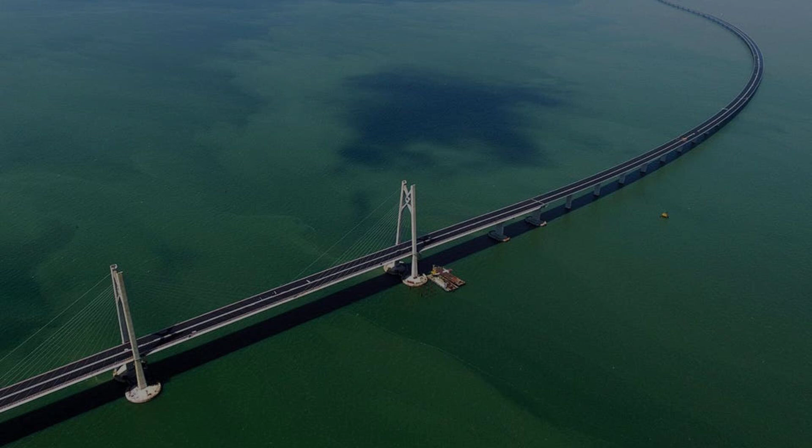It's the longest bridge ever built, stretching an impossible 164.8 kilometers across China's floodplains and lakes, a structure so vast that, by all common sense, it shouldn't even stand. Every engineer knows, for each extra span, the risks multiply. Soil that swallows support columns, fault lines ready to crack concrete, typhoons strong enough to tear steel and lift loads from thousands of speeding trains.

By traditional logic, this record-breaking bridge should already have failed. So why does it defy the odds? And what hidden choices let it survive day after day? The answer isn't a single miracle, but 1,000 invisible defenses you've never seen. And every one is about to be tested.

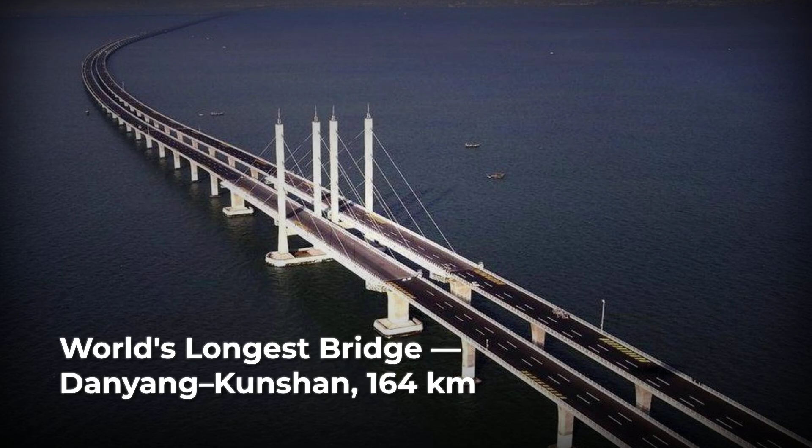The title of longest bridge is less straightforward than it seems. Different authorities use different yardsticks, and the record can shift depending on how you measure. The Danyang Kunshan Grand Bridge in China holds the Guinness World Record for overall length, stretching 164.8 kilometers across the Yangtze River Delta. This measurement includes every elevated viaduct, approach ramp, and segment, whether the bridge crosses water, marsh, or dry land. By this metric, it is the world's longest bridge, nearly 4 times longer than the English Channel itself.

Other bridges claim records by focusing only on certain segments. The Lake Pontchartrain Causeway in the United States, for example, is often called the longest bridge over water, at 38.4 kilometers of continuous span above the lake. The Hong Kong, Zhuhai, Macau Bridge, at 55 kilometers, is promoted as the world's longest sea crossing, combining bridges, artificial islands, and a tunnel under the Pearl River Delta.

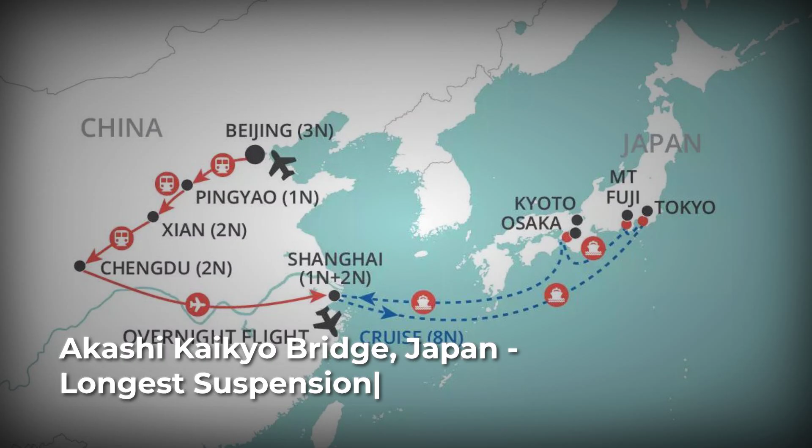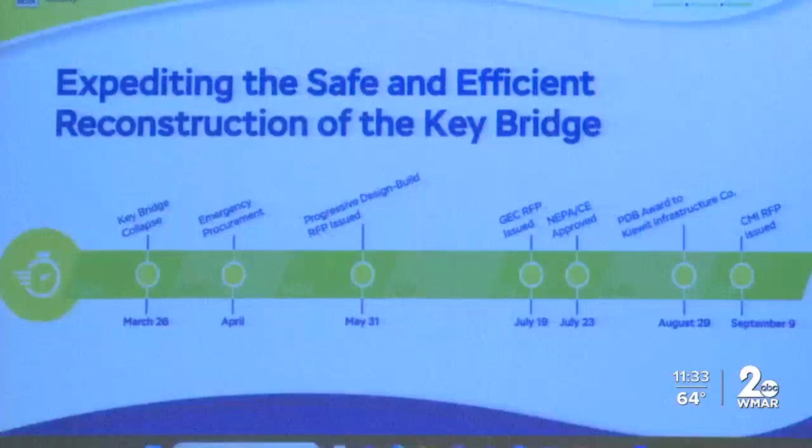Meanwhile, the Akashi Kaikyo Bridge in Japan is recognized for the longest single suspension span, at 1,991 meters between towers, a feat of unsupported engineering. There is no single technical standard. Some lists count every approach and elevated segment. Others count only the main span or uninterrupted water crossing. National governments and engineering bodies often choose the definition that best highlights their own achievements.

For China, the Danyang Kunshan Grand Bridge is a symbol of scale. 164.8 kilometers of viaduct, supported by more than 9,500 piers, carrying high-speed trains at up to 300 kilometers per hour. The bridge connects the cities of Danyang and Kunshan, threading across floodplains, rice paddies, and open water. Choosing this alignment was never about chasing a record.

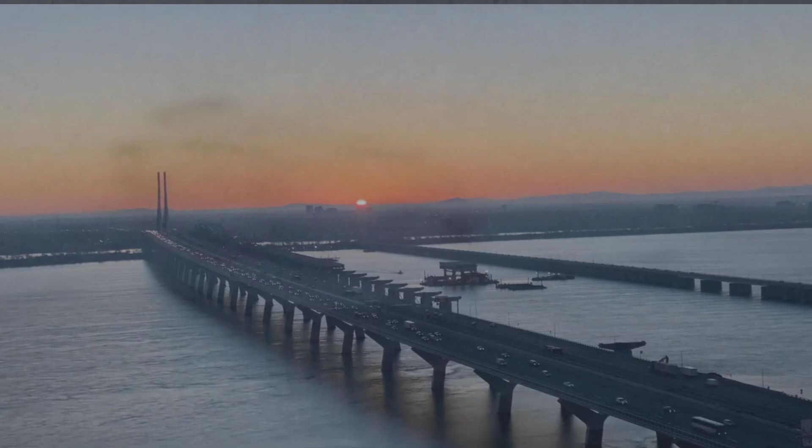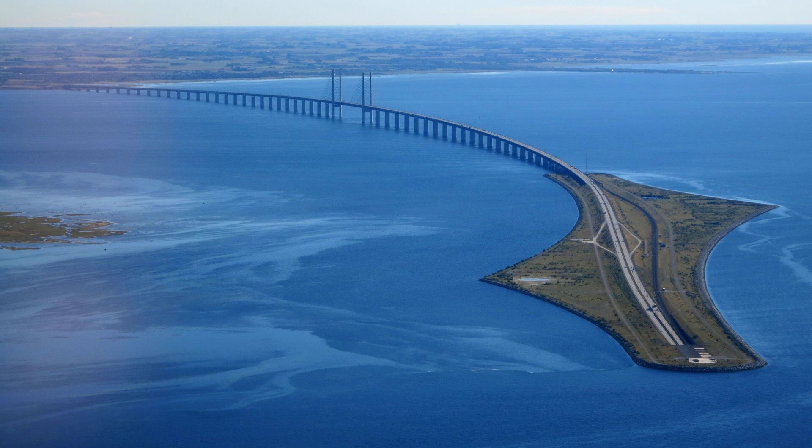Engineers weighed every alternative: tunnels, causeways, ferries, and found each one lacking. Tunnels at this scale risk leaks, ventilation failures, and massive upfront costs. Ferries mean delays, weather shutdowns, and limited capacity. Only a continuous viaduct could deliver the reliability, speed, and year-round operation demanded by China's high-speed rail network. The result is a bridge that redefines the very idea of crossing, a structure so long that, from end to end, the earth itself seems to curve beneath it.

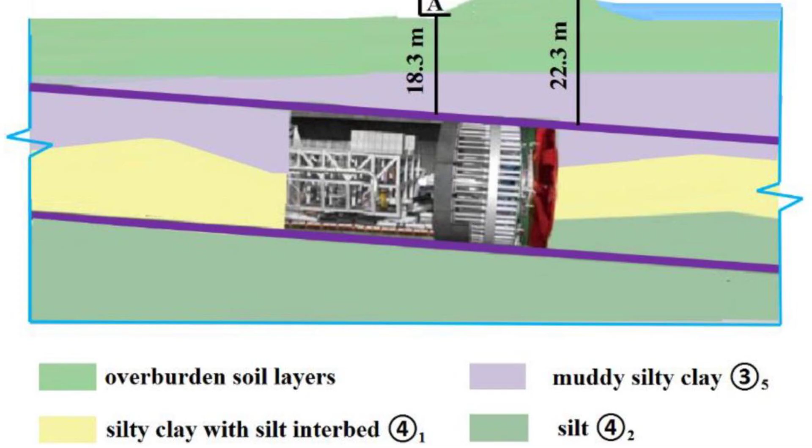A viaduct was not the obvious answer. On paper, a tunnel offered shelter from storms and ship collisions, but the Yangtze Delta's soft soils, high water table, and shallow bedrock made deep excavation hazardous and expensive. Ventilation alone would require vast shafts every few kilometers, and any fire or blackout could trap thousands underground.

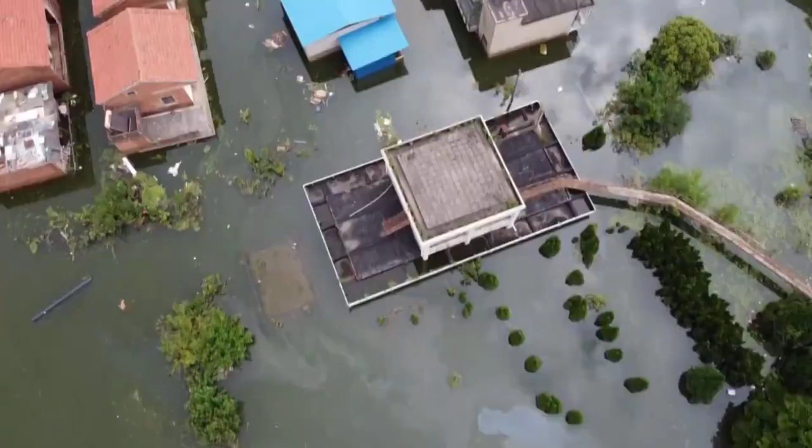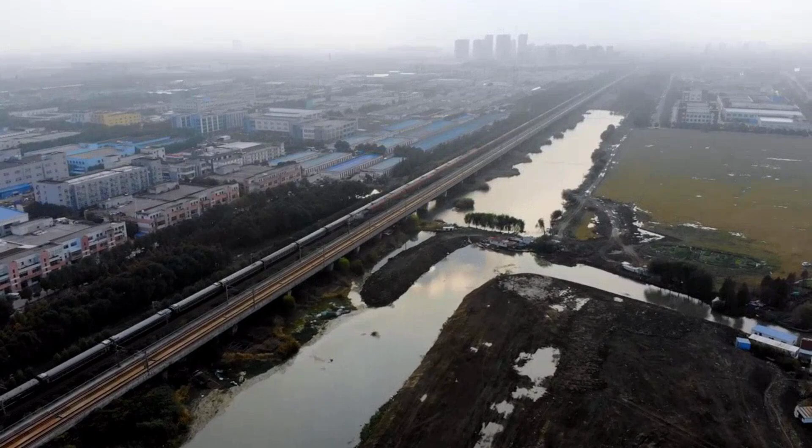Ferries, once the lifeline of the region, are no match for modern demand. Each crossing is at the mercy of fog, typhoons, and river floods, with hours lost to weather shutdowns and maintenance. Even a causeway, solid earth embankments across the marsh, would block water flow, disrupt fragile wetlands, and quickly erode under the relentless current. The viaduct, a continuous ribbon of concrete and steel, offered speed and certainty. But this choice unlocked a new set of dangers, multiplied by the bridge's record length.

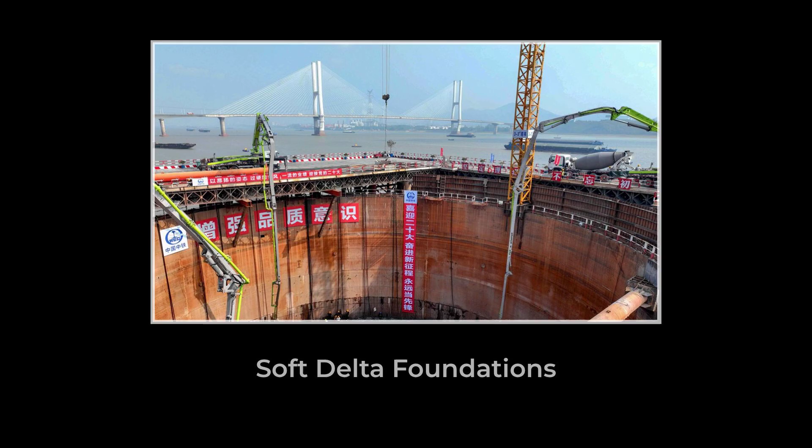The entire route sits atop delta soils prone to settlement and liquefaction, especially during floods or earthquakes. Land beneath the piers may sink or shift, twisting the structure above. Active seismic faults cut across the alignment, threatening sudden ground movement. Typhoons sweep in from the East China Sea, bringing hurricane-force winds and waves that test every span, every joint.

Rivers flood with little warning, scouring away the ground around piers and foundations. The risk of ship collision is ever present as barges and tankers thread narrow channels beneath the bridge. Temperature swings of 40 degrees Celsius stretch and shrink the deck by meters, straining every joint and bearing.

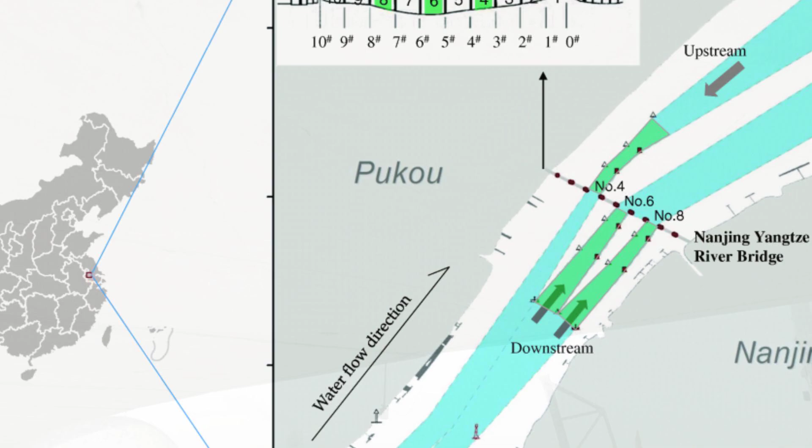And above all, the bridge must carry the live load of hundreds of high-speed trains each day, each one a moving shockwave of force. Every kilometer adds another layer of risk. The longer the bridge, the more ways nature can find a weak point.

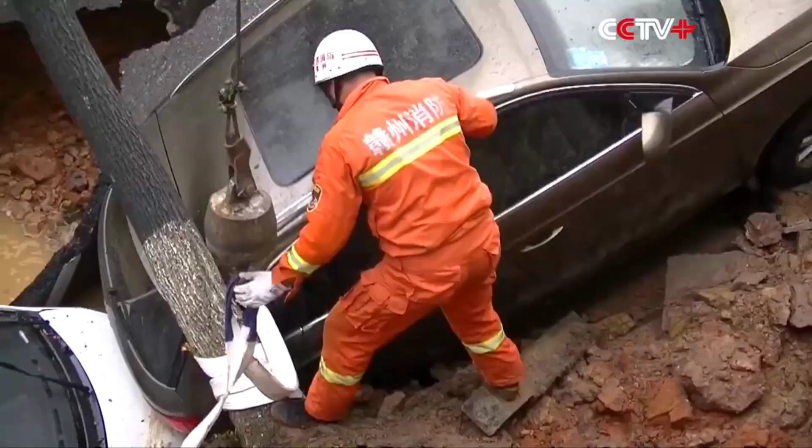Engineers had to face not just one hazard, but a tangled web: soft ground, sinking land, earthquakes, storms, water, ships, heat, and the weight of relentless traffic. The solution would demand new thinking at every step. Only by stacking defenses, foundation by foundation, could the bridge hope to survive where, by all rights, nothing so ambitious should ever stand.

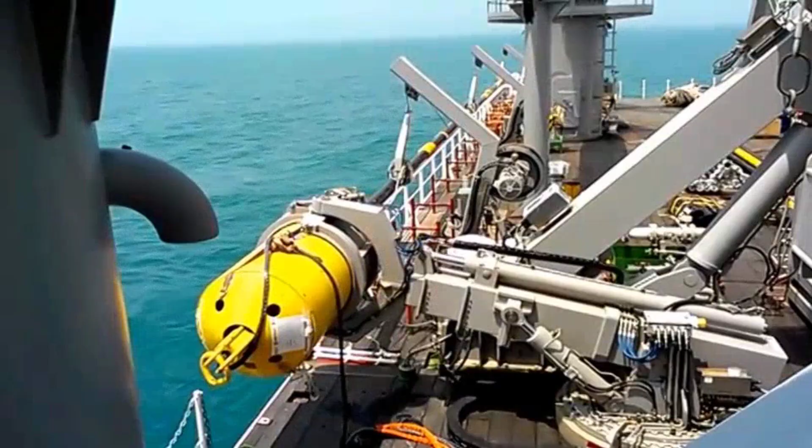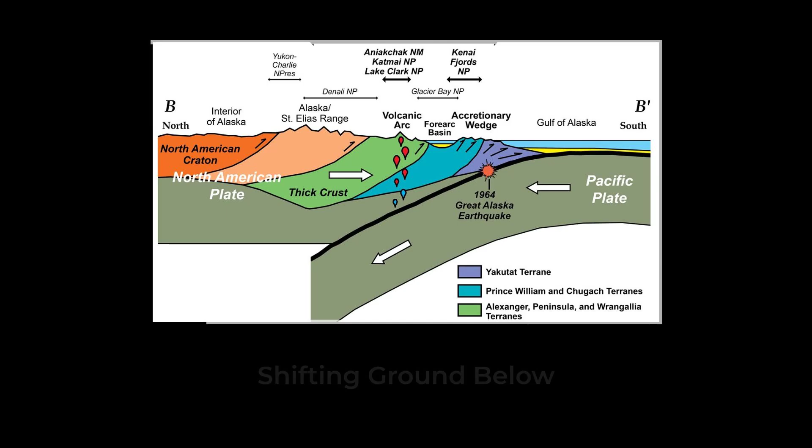Li Changhe stands at the edge of the Yangtze Delta, boots sinking slightly into ground that looks solid but cannot be trusted. Beneath the surface, layers of silt and clay run hundreds of meters deep, deposited by ancient floods and tides. This is the greatest threat to the world's longest bridge, not wind, not water, but the slow, invisible movement of the Earth itself. To anchor a structure stretching 164.8 kilometers, engineers must reach past the softness.

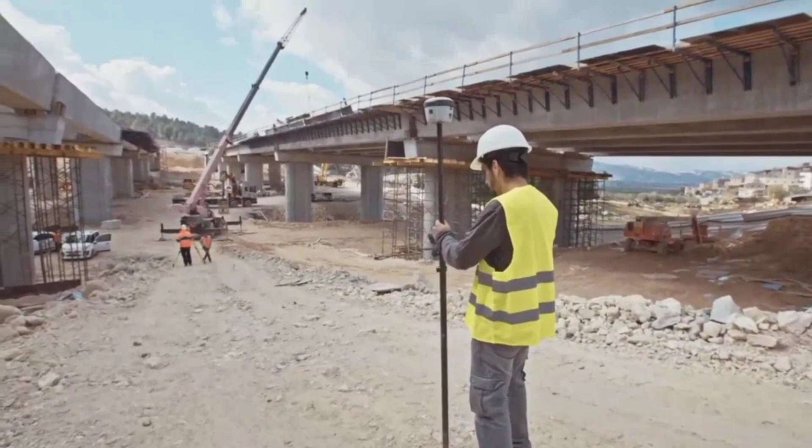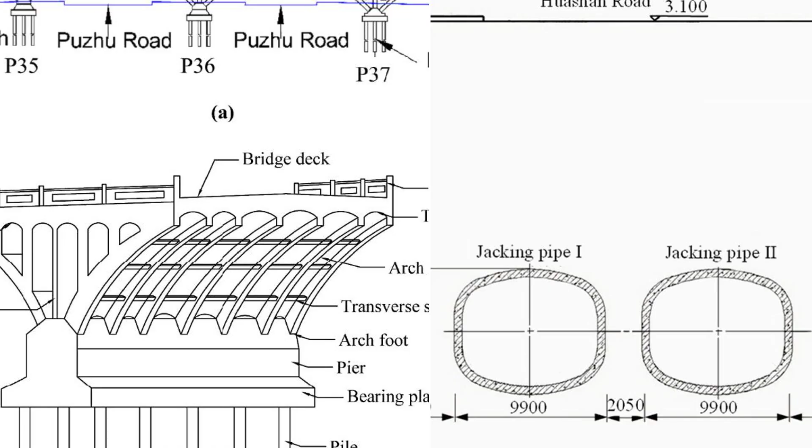Each pier sits atop a forest of concrete piles, driven 50 to 70 meters below the marsh until they bite into stable sand or gravel. Some piles are as long as a 20-story building laid on its side. The load of the bridge is transferred downward, bypassing the unreliable upper layers and settling on ground that has not moved for millennia. But even this is not enough.

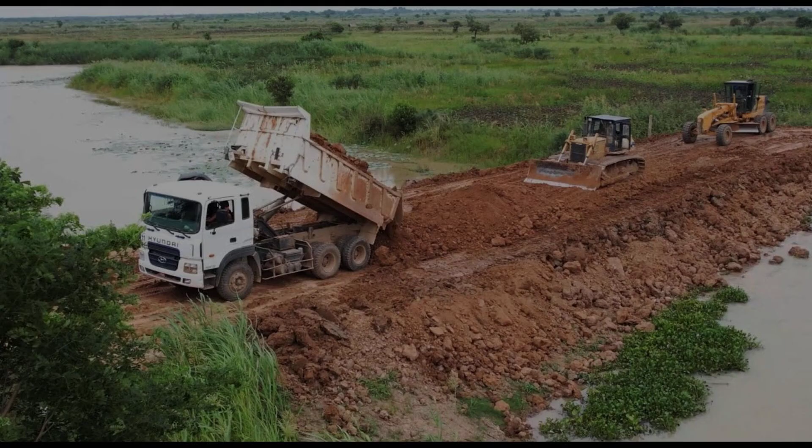Before a single span rises, the Earth must be taught to carry weight. Months before construction, teams haul in tens of thousands of tons of fill, stacking soil into low mountains along the road. This pre-loading, or surcharge, compresses the ground, squeezing out water and forcing the clay to settle ahead of time. Sensors record every millimeter of movement. In some places, the land sinks by more than half a meter over the course of a year.

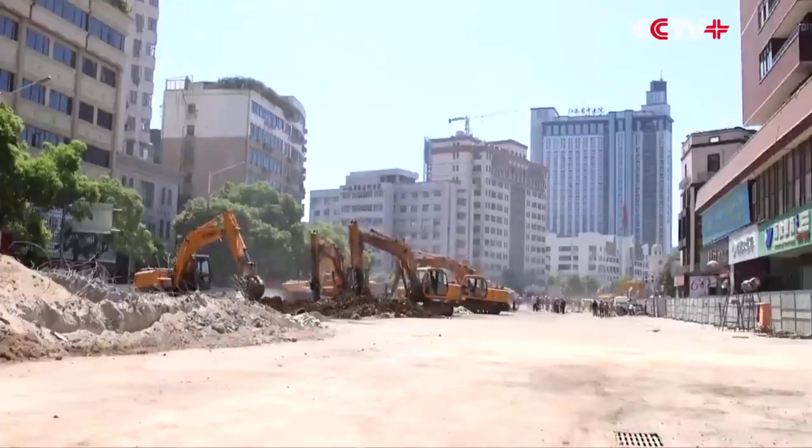Only when the readings level off do workers strip away the fill and begin building the real bridge, confident that future settlement will be slow and predictable. The process is painstaking. Each foundation is mapped, measured, and checked again. If a single pile misses its mark, or if the ground shifts unexpectedly, the entire span above could twist or crack. Li Changhe's team spends years studying the soil, drilling test cores, and running simulations.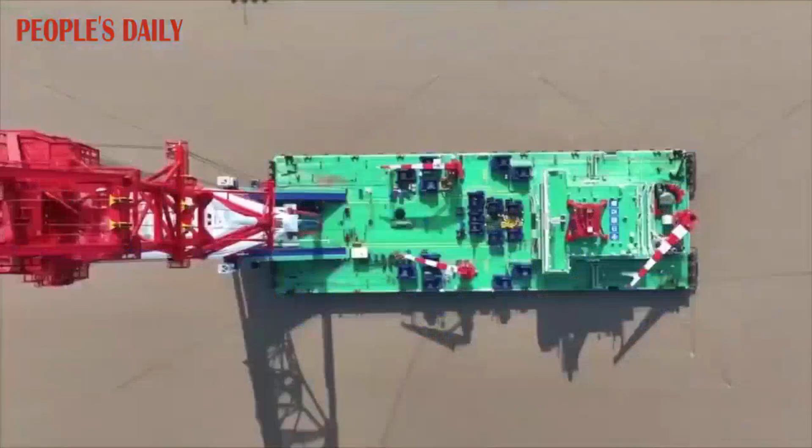Their goal is not just to build, but to outlast the river and the ground beneath. The bridge begins not with steel or concrete, but with a battle against the Earth itself. A battle won meter by meter, pile by pile. The Yangtze Delta's soil is a shifting puzzle, layers of silt, clay, and sand that resist easy solutions.

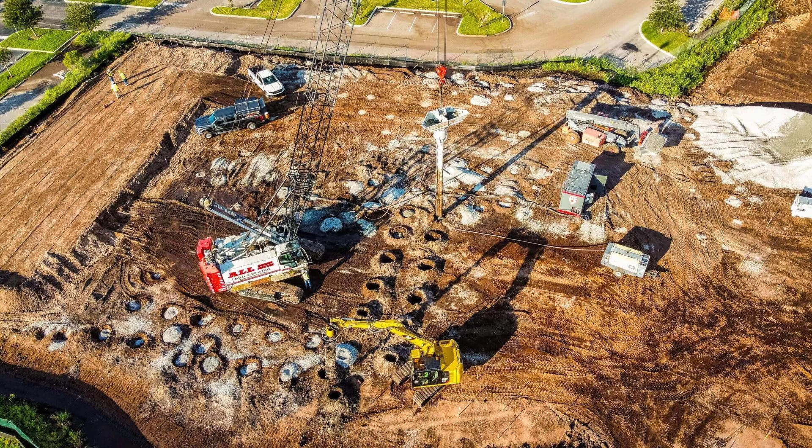Even after deep piles reach solid ground, the space between each foundation must be made strong enough to carry the weight above. To achieve this, engineers create a hidden grid of stone columns beneath the surface. Each column, about 0.8 meters in diameter, is formed by driving crushed rock deep into the soft clay. These columns are arranged in a tight lattice, sometimes spaced just 2 to 3 meters apart, forming a network that stiffens the entire ground matrix. The result is a reinforced base that spreads the load evenly, preventing the bridge from settling unevenly or tilting over time.

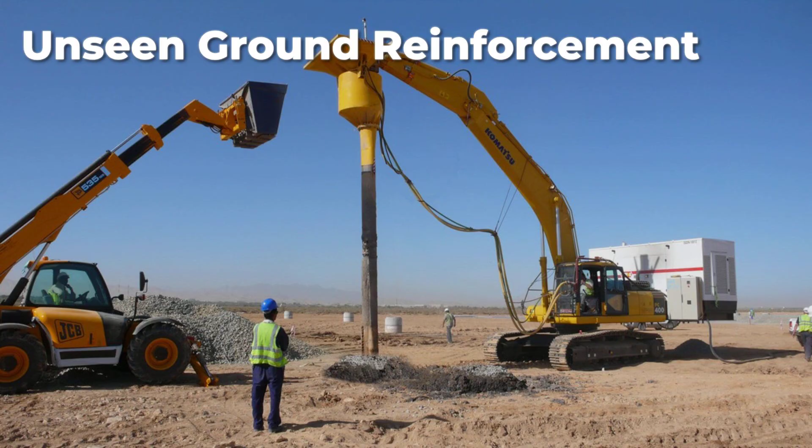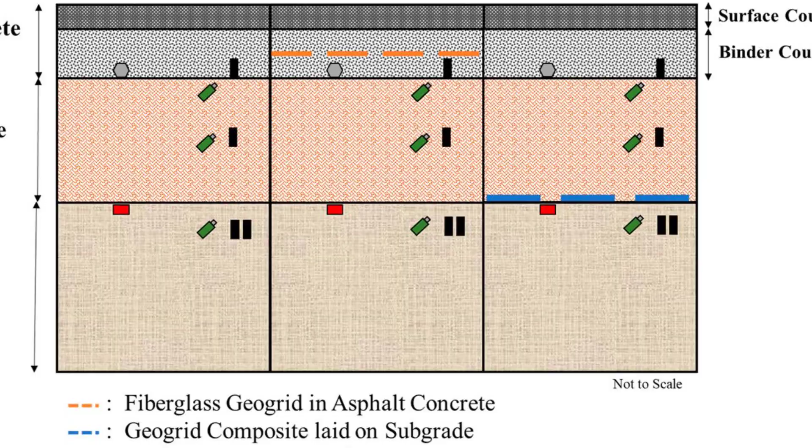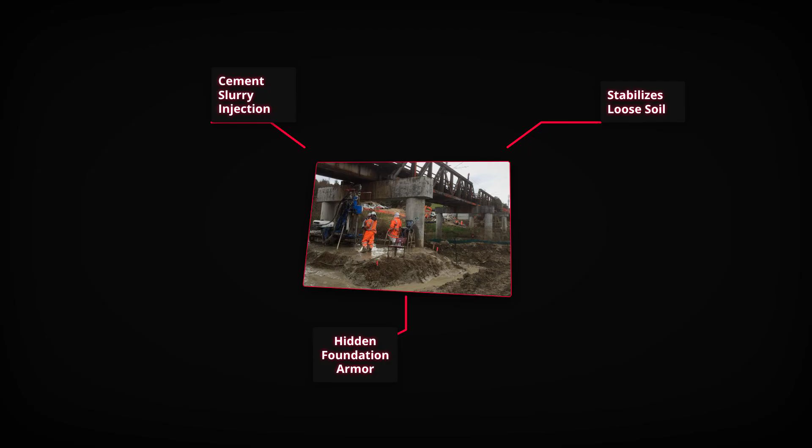In areas where the soil remains especially loose, vibrocompaction is used. This technique drives a vibrating probe into the ground, shaking the sand and silt into a denser, more stable mass. The process is repeated in a pattern, ensuring that no pocket of weakness remains. Grouting adds another layer of defense. Engineers inject cement slurry into the earth, filling gaps and binding loose grains together, especially around the toes of piles and beneath critical piers. This reduces the risk of water seepage and boosts the strength of the weakest layers.

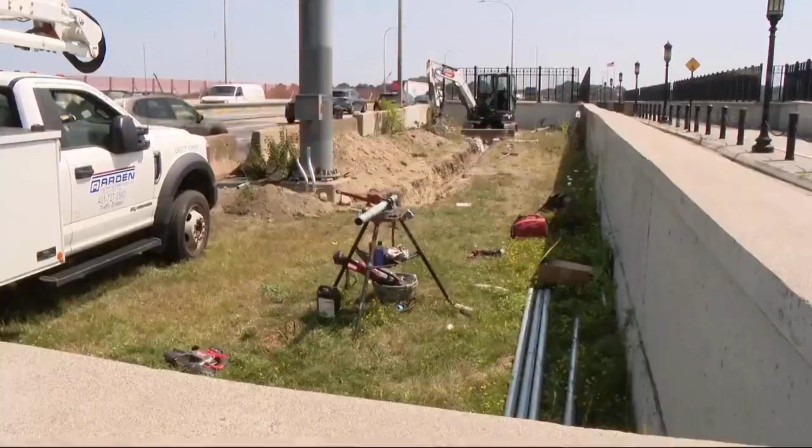Each decision is checked by sensors and survey plates, which monitor settlement in real time and flag any movement outside the safe zone. These ground improvement tactics are not visible from above, but they are the reason the viaduct can stretch for 164.8 kilometers without sagging or cracking.

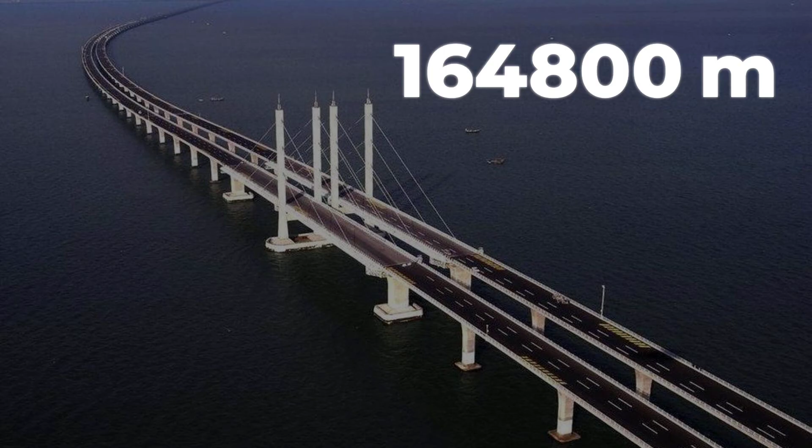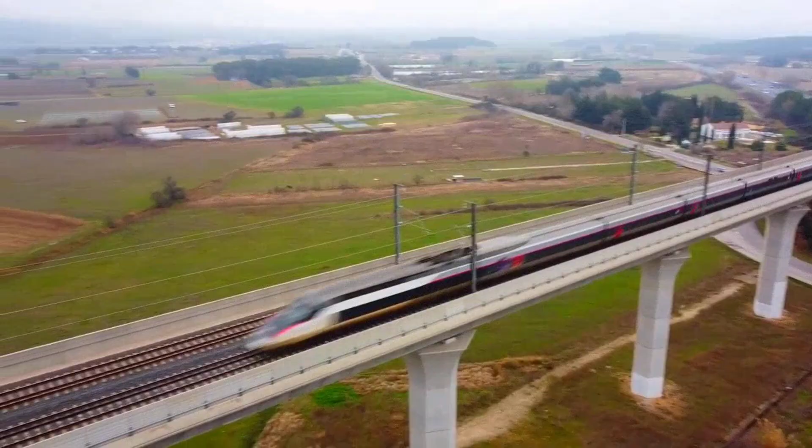The bridge's survival depends on a matrix of stone, sand, and grout, an invisible armor that lets the superstructure rise and carry the weight of high-speed trains season after season across land that was never meant to hold such a burden. Every span of the Danyang Kunshan Grand Bridge moves, flexes, and breathes with the world around it.

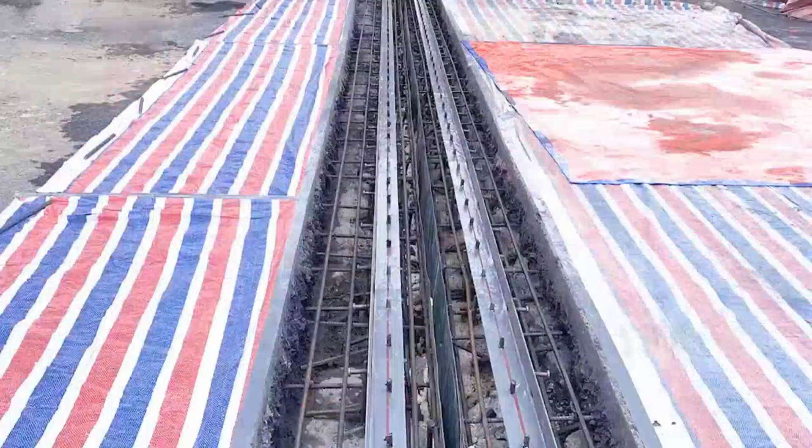Temperature swings of 40 degrees Celsius can stretch the deck by more than a meter across its full length. To manage this constant drift, engineers rely on pot bearings, each capable of absorbing up to plus or minus 200 millimeters of movement. These bearings act like giant sliding pads, letting the bridge expand and contract without cracking or jamming against its supports. At every pier, expansion joints create a controlled gap, wide enough to swallow the daily push and pull of steel and concrete.

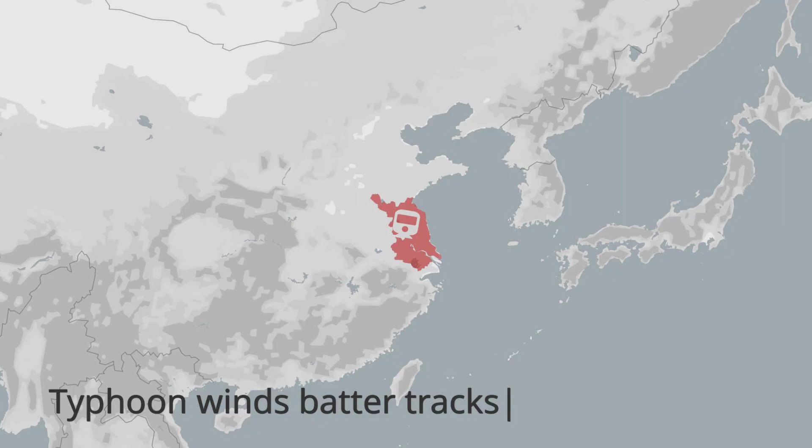But movement isn't just about heat. The Yangtze Delta is famous for storms that can whip up winds strong enough to rock a train off its tracks. The bridge's aerodynamic profile is sculpted to slice through these gusts. Its deck is shaped with subtle curves and edges, breaking up the airflow and stopping dangerous vibrations before they can build. Underneath, fairings and diaphragms channel the wind, reducing the force on every span.

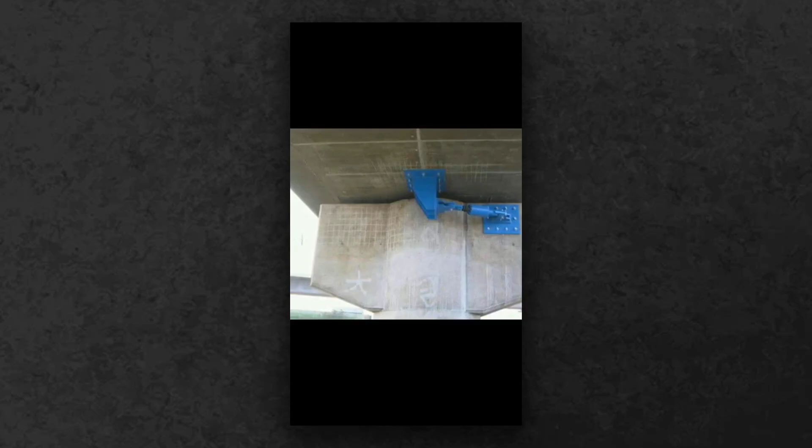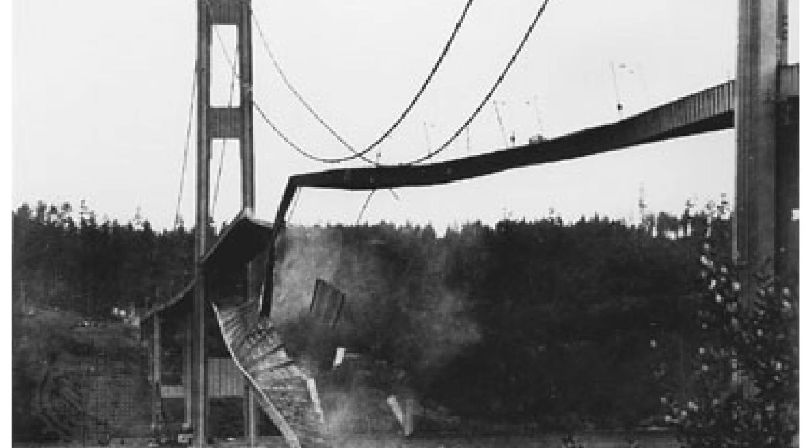Even so, wind can set a bridge humming like a tuning fork. To counter this, tuned mass dampers are installed inside the structure. Each damper is precisely calibrated, tuned to frequencies between 0.9 and 2.2 Hz, the same range as the bridge's natural sway. When the wind tries to set the deck in motion, the dampers swing in opposition, sapping energy and keeping the bridge steady.

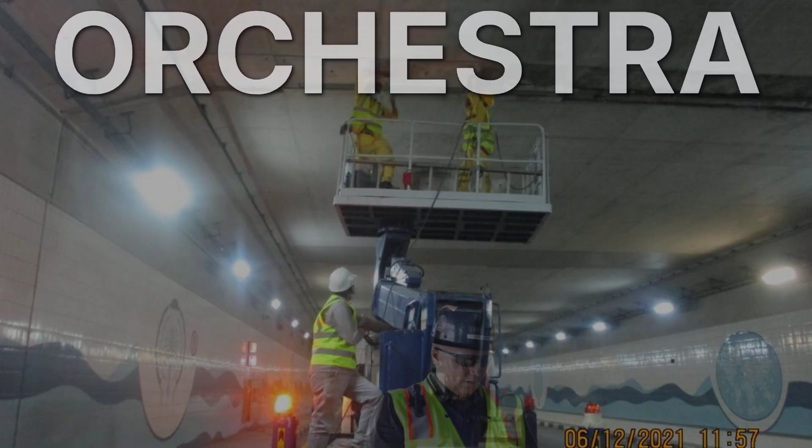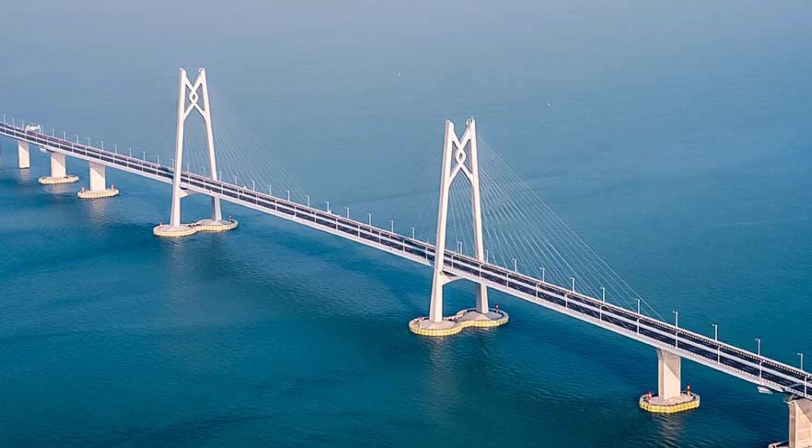Li Changhe, the project's wind specialist, describes it as a kind of invisible orchestra, every bearing, joint, and damper working in harmony to let the world's longest bridge shrug off storms that would threaten any ordinary span.

Every record-length bridge is designed with the expectation that something, someday, will go wrong. The Danyang Kunshan Grand Bridge is no exception. Instead of relying on a single line of defense, engineers build in redundancy at every level. Each span, each pier, and each joint is part of a network that can reroute loads if damage occurs.

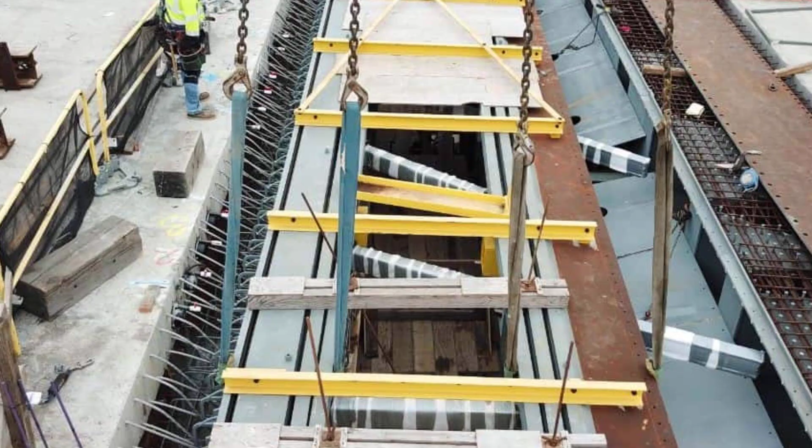If one section is struck by a ship or weakened by settlement, the bridge's segmented construction allows forces to bypass the affected area. Main load-bearing elements are sized to withstand 2 to 3 times the maximum expected stress. This margin, known as the safety factor, is not a luxury. It is a requirement for survival across 164.8 kilometers of shifting ground and relentless traffic.

Corrosion is a constant adversary. To combat rust, every steel surface is coated with advanced paints and galvanization, while cathodic protection systems run electrical currents to arrest the chemical reaction before it can eat through the metal. These systems are checked on a strict schedule, often every few months, with maintenance teams recording voltage, current, and any signs of breakdown. Drainage channels and waterproof membranes keep water from pooling at joints and bearings where corrosion can start unseen.

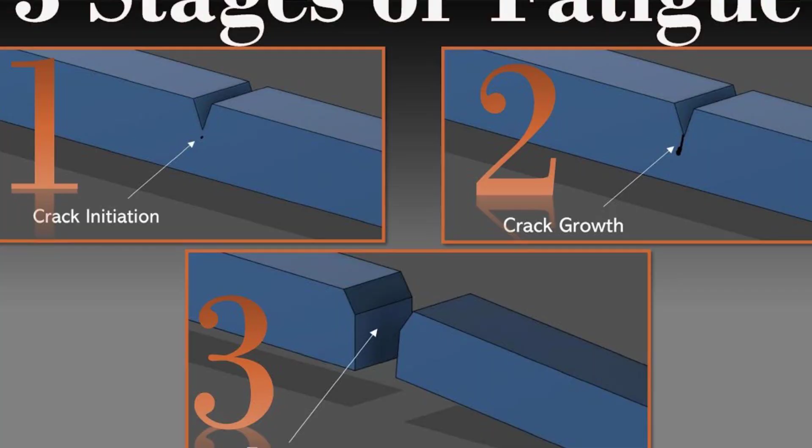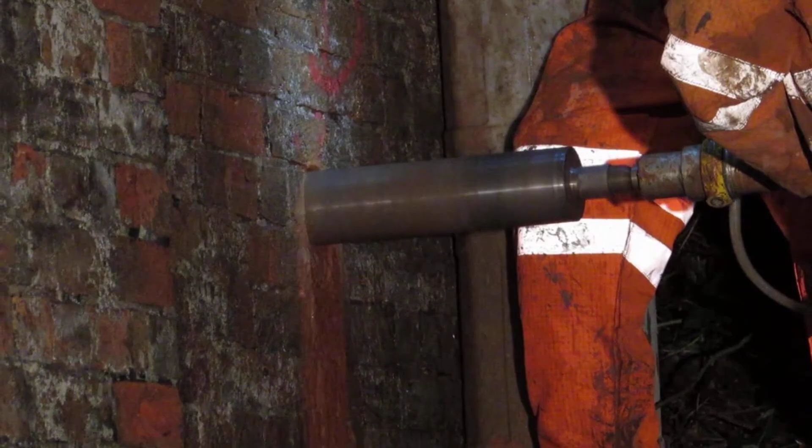Fatigue is another silent threat. High-speed trains crossing the bridge create millions of cycles of stress each year. Microcracks can form in welds, bearings, and cables, too small to spot at first, but capable of growing with every passing load. Inspectors like Zhang Wei walk the length of the bridge, tapping welds and scanning surfaces with ultrasonic devices. Every weld and joint is logged, tracked, and compared against previous inspection cycles. If a crack is found, it is drilled out or reinforced before it can spread. Inspection intervals are not left to chance.

Critical elements are checked as often as every 6 months, with less stressed components on an annual schedule. This routine, layer upon layer of checks, coatings, and built-in backup, ensures that the bridge does not depend on any single component or flawless performance. It is a survival strategy built on the expectation of failure and on the discipline to catch small problems before they become disasters.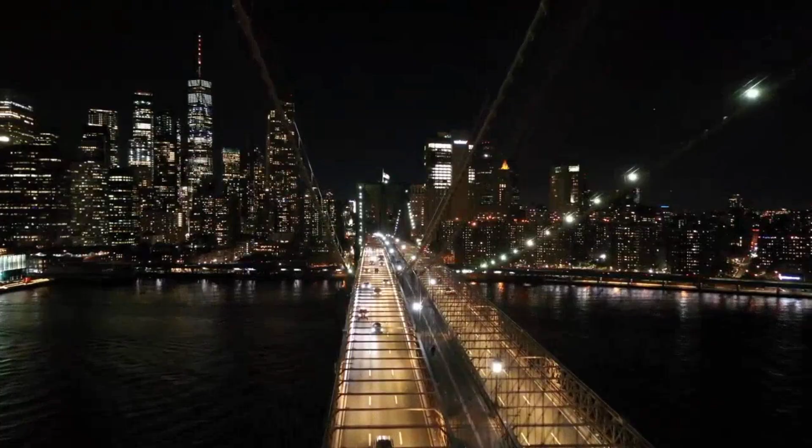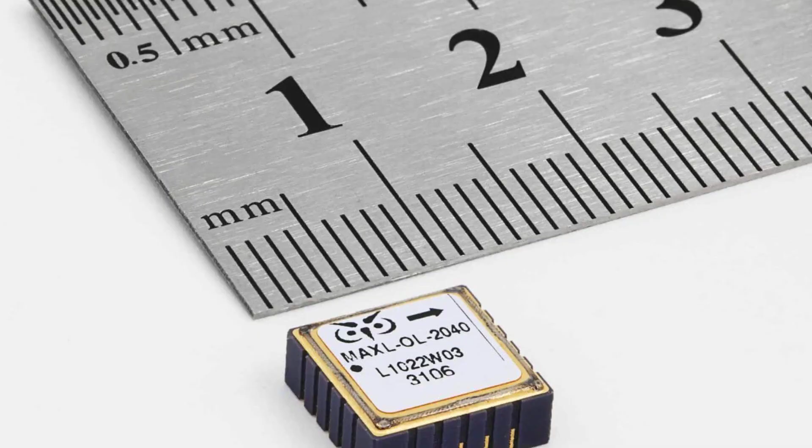A bridge that stretches for 164.8 kilometers cannot rely on memory or routine. Instead, it is watched by a digital sentinel, over 1,200 sensors embedded throughout its length, forming a nervous system that never sleeps. Strain gauges measure the flex of steel and concrete as each high-speed train races overhead. Accelerometers and tilt sensors detect the faintest tremor, whether from distant earthquakes or the subtle shift of settling ground.

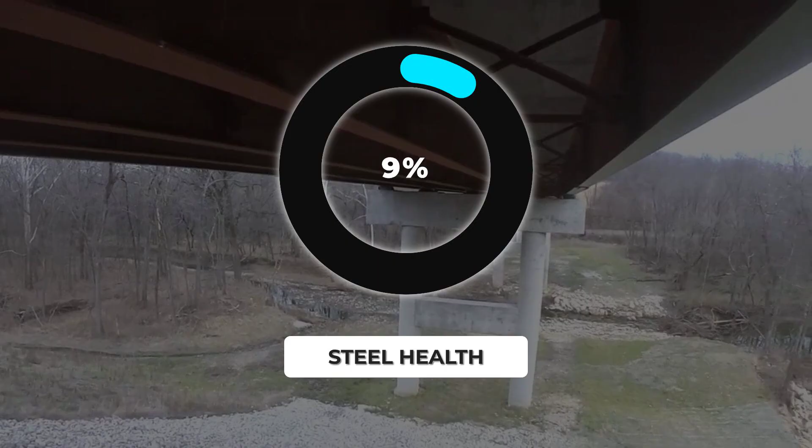Displacement meters track how much each span expands or contracts with the seasons, and corrosion sensors monitor the condition of hidden steel, alerting operators before rust becomes a threat. All this data flows into a central command room, where the bridge's operations director and her team read live dashboards of numbers and graphs. If a sensor detects unusual movement, perhaps a pier settling faster than expected, or a joint flexing out of range, the system triggers an alert. Maintenance crews are dispatched long before a problem becomes visible to the naked eye.

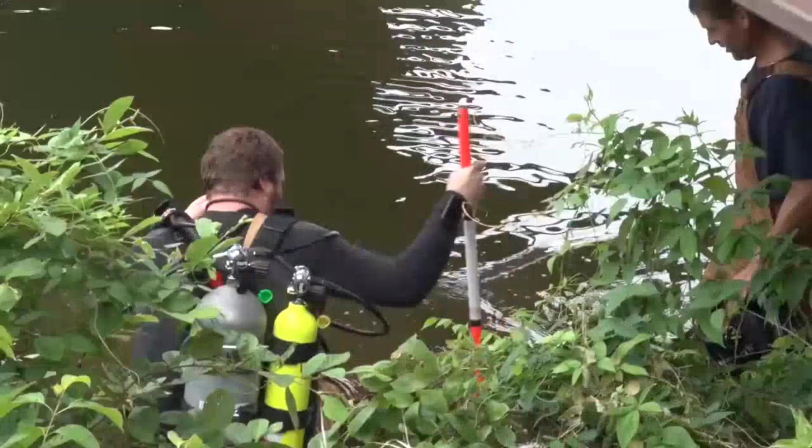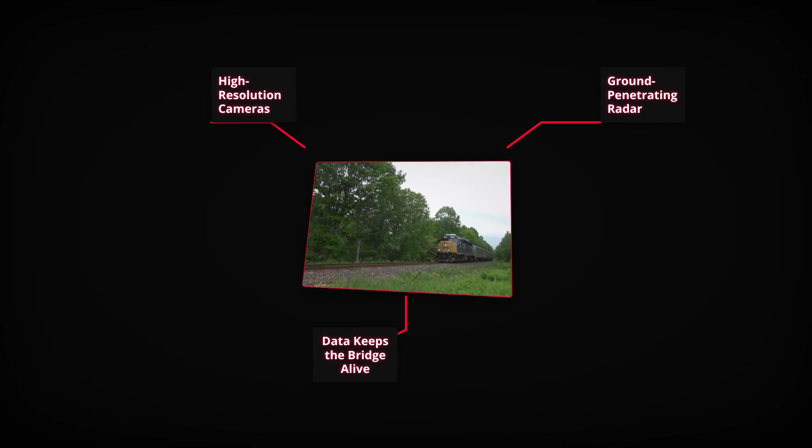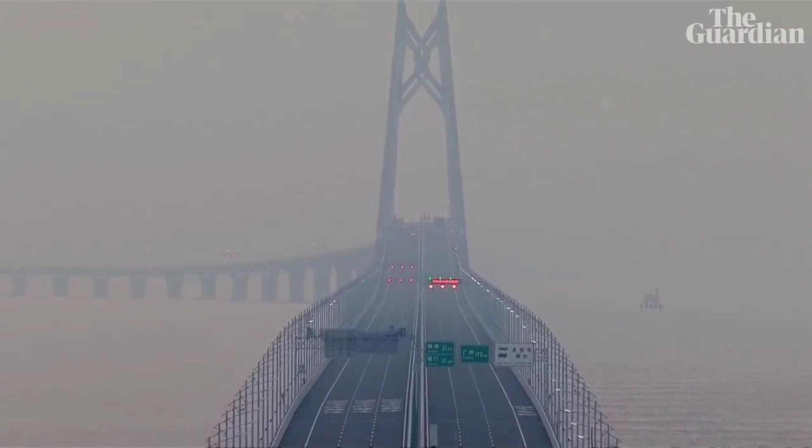On a typical week, drone flights scan the viaduct from above, capturing high-resolution images for comparison with last month's inspection. Specialized trains equipped with cameras and ground-penetrating radar roll along the rails, checking for cracks or voids beneath the surface. Every anomaly is logged, tracked, and, if necessary, scheduled for repair. This is not just routine oversight. It is predictive maintenance, an approach that turns every sensor reading into an early warning. The bridge's survival depends not on luck or hope, but on a constant stream of information. In the world's longest bridge, vigilance is engineered into every meter, every day.

Operational rules for the world's longest bridge are set with precision. Speed limits, lane controls, and crosswind protocols are enforced automatically, with real-time data from more than 1,200 embedded sensors. When wind speeds rise above 130 kilometers per hour, traffic is slowed or halted, far less often than ferries are sidelined by fog or floods. Emergency laybys appear every few kilometers, and escort vehicles guide oversized loads, ensuring that even during storms or seismic events, safety remains uncompromised.

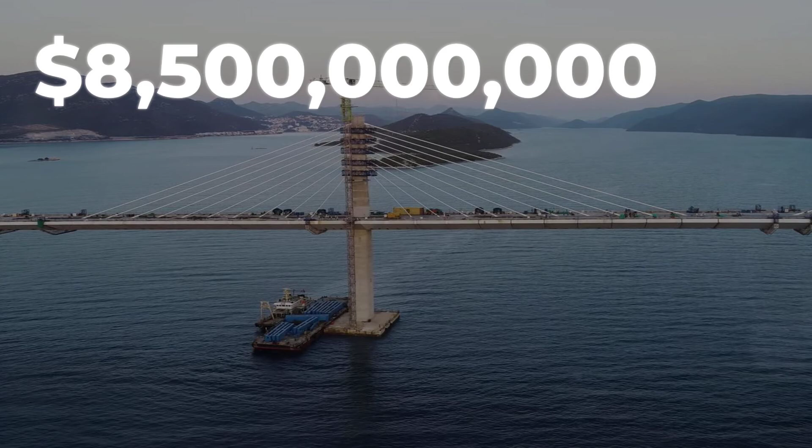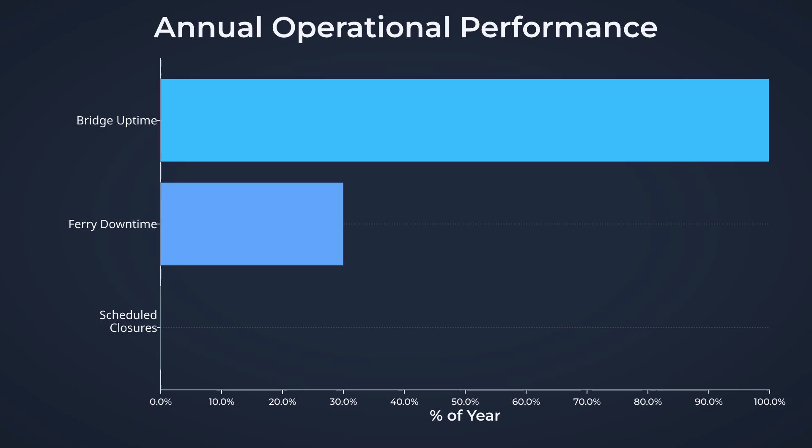The cost of building the Danyang Kunshan Grand Bridge reached $8.5 billion, a figure that once drew skepticism from critics. But transport economists point to the numbers that matter over time. The bridge delivers over 99.9% uptime each year, compared to ferries that lose up to 30% of operational hours to weather and maintenance. Scheduled closures are rare and brief, planned well in advance based on predictive maintenance models that draw from decades of sensor data. Over a 50-year horizon, the bridge's uninterrupted service saves millions of hours in travel time, reduces accident rates, and supports a high-speed rail network that moves tens of millions annually.

The value is not just in the steel or concrete, but in the stacking of 10 distinct domains: ground improvement, deep foundations, seismic isolation, aerodynamic shaping, redundancy, corrosion defense, fatigue management, real-time sensing, predictive maintenance, and traffic control. Each one adds a margin of safety, reliability, or efficiency. A transport economist puts it simply: a bridge looks expensive until you add up every storm-canceled ferry, every hour saved, and every shipment sped up over 50 years. It shouldn't stand until you see how every meter is engineered to let it.

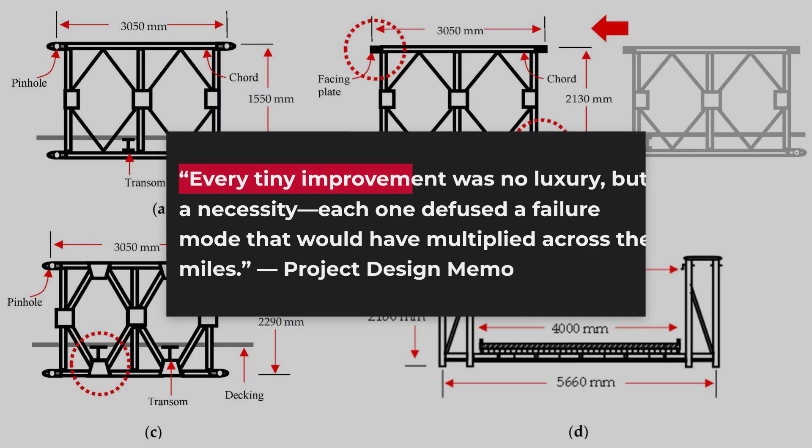At 164.8 kilometers, the Danyang Kunshan Grand Bridge stands as the world's longest, supported by over 50,000 deep piles and monitored by more than 1,200 sensors. The documentary has shown how engineers responded to soft soils, typhoon winds, seismic zones, and relentless traffic, using solutions like 70-meter piles, pot bearings with plus or minus 200 millimeter movement, and inspection cycles measured in weeks, not years. Documents confirm these marginal gains were not a luxury, but a necessity, each one addressing a failure mode that multiplies with distance.

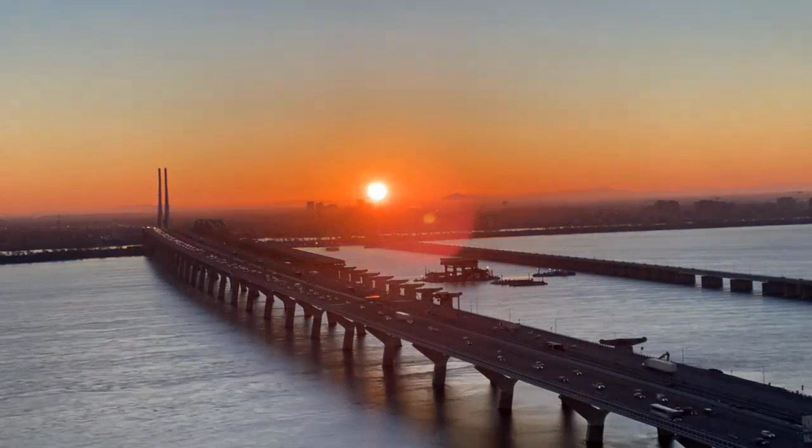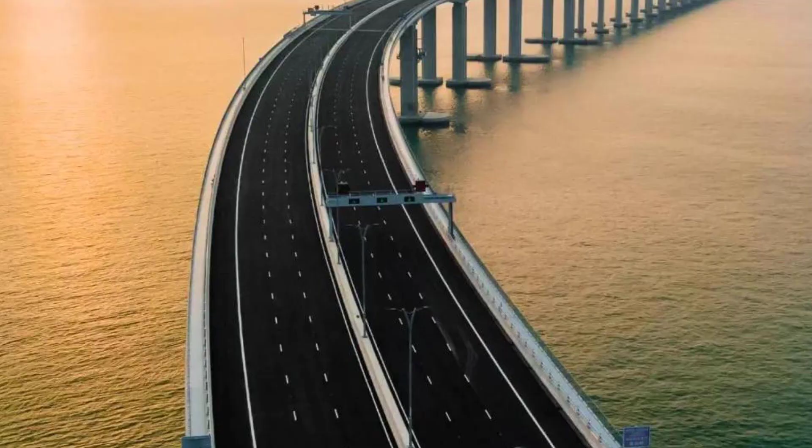Yet not all data is public. The full maintenance logs and some stress test results remain classified by local authorities. Still, the facts are clear. Across 5 decades of service life, the bridge's uptime and safety records have outperformed ferries and tunnels. The lesson is simple. Record-breaking spans do not cheat physics. Instead, they turn every threat into a checklist and every meter into an engineered answer. It shouldn't stand until you see how every meter is engineered to let it.